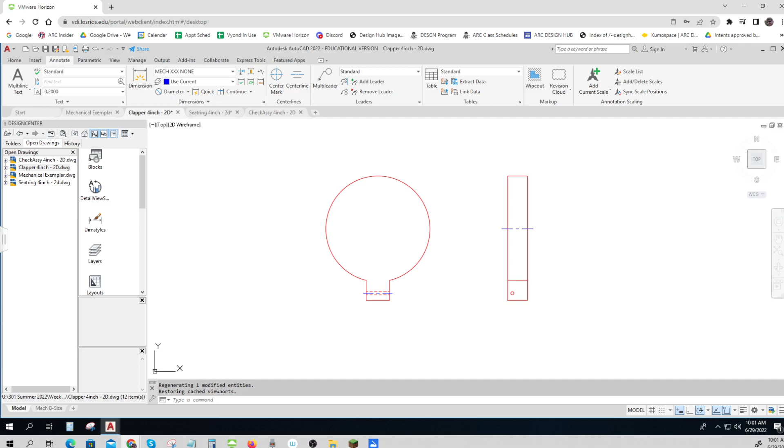And so the first thing I need to do is bring in my parts. And I'm going to do this a very simple, basic way. There are other more complex and cool and interesting ways, but this will work. So I've opened up my clapper. I'm in model space. And I'm going to select my actual part, right click, and I'm going to copy to the clipboard.

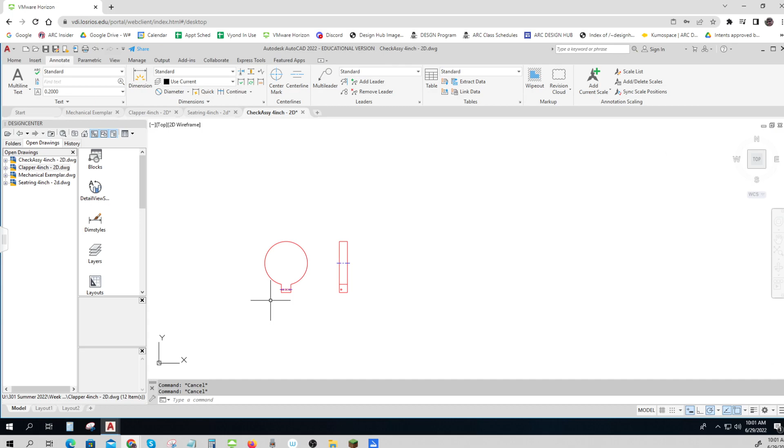And then I'll go to my drawing of the check assembly, right click, and paste. And there are my parts. So now I need to do the same thing with my seat ring. Go to the model. Highlight, right click, copy to the clipboard. Right click, paste.

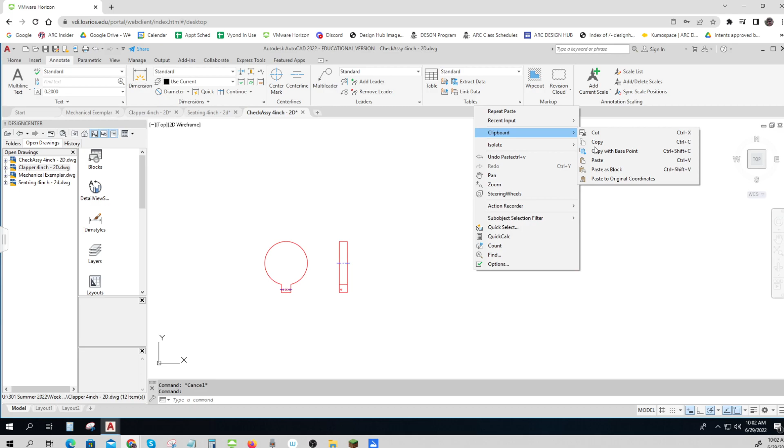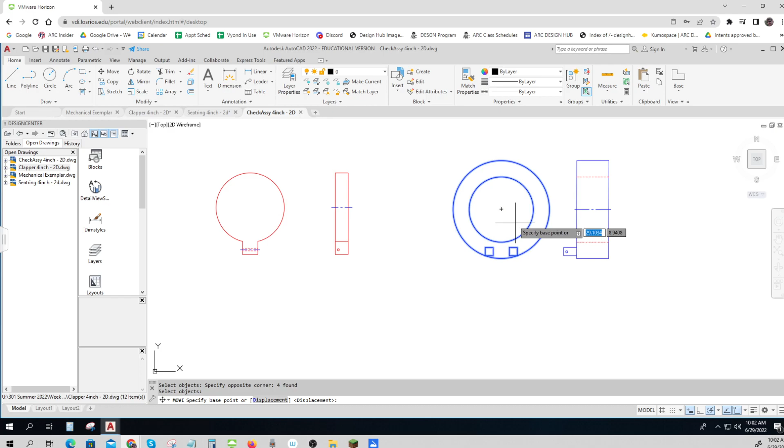Now it's just a matter of putting these parts together. So let me go ahead and do that. I'm going to put this part and line it up here. So that's the move command. And I'm going to place the center on the center. And that looks pretty good. Now this particular line, I want to change to a hidden line because it's underneath the clapper. There we go.

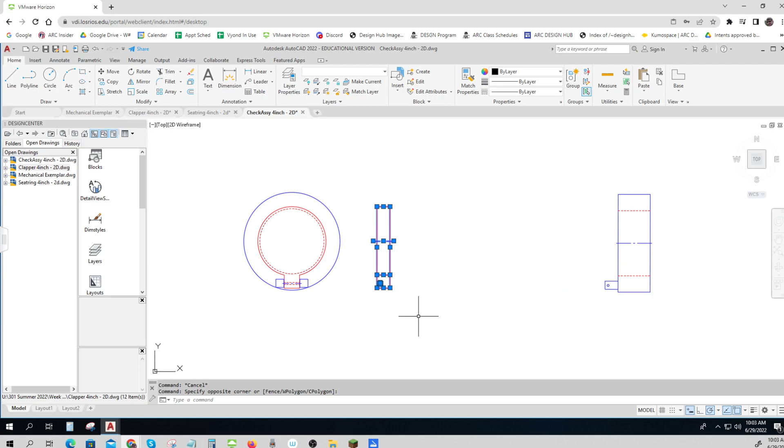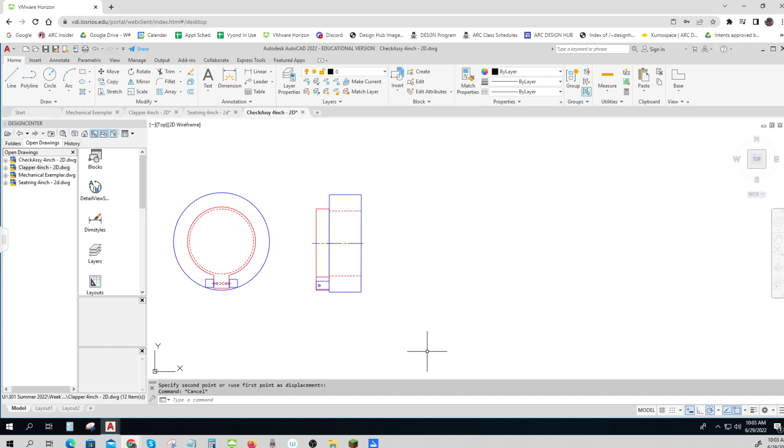And this one, I'm going to line these two little holes up, and hopefully two little holes line up. Yep, looks pretty good. So there we go. I've got my things done. So now I want to move these closer together so I can show them in my assembly. So I'll save that. I've got my parts put together. Looks like a check assembly. There's two parts. So I think that's going to go on a B-size drawing again.

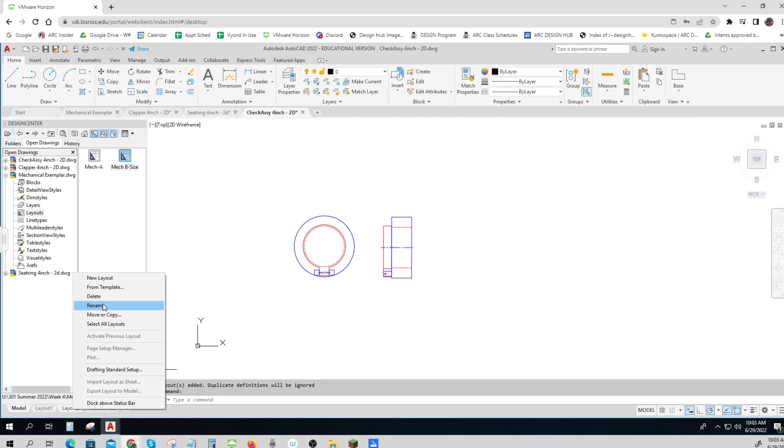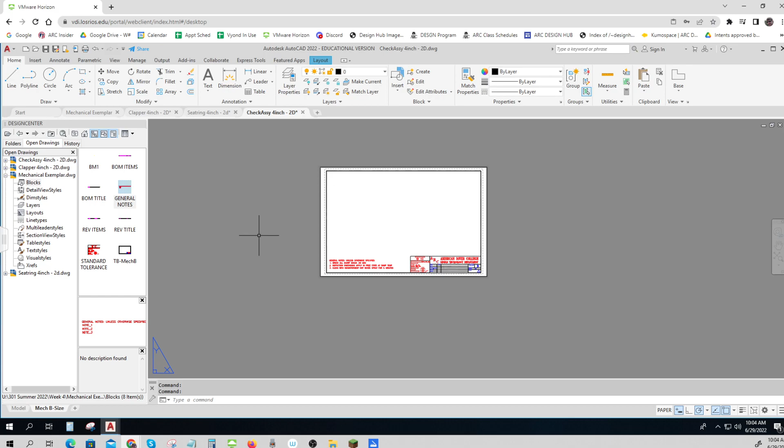So let me bring my layouts together and bring in a B-size. You're getting good at this by now. Right click, delete that layout. Right click, delete the other extra layout. I've got just my mechanical layout. I'm going to do the same thing. I'm going to put in my notes and all that kind of stuff. It's okay that we're using the exact same ones over and over again, and they may not be perfect and correct for what we're doing. But it's giving you the idea of what happens every time. Here's my revision block title and my items.

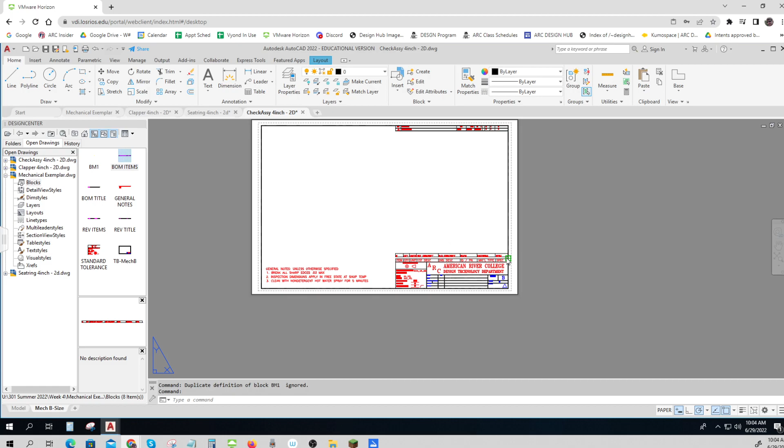There's one other thing that goes on an assembly drawing. That's a bill of materials. So I'm going to put my bill of materials title in, and then I have two items, so I need two of the items put in. And I'll go back and fix those at another time. So that's a new thing that goes on there. I'm going to have item 1 and item 2. Item 1 will be, for instance, my clapper, and item 2 will be the other one. What is this thing made out of?

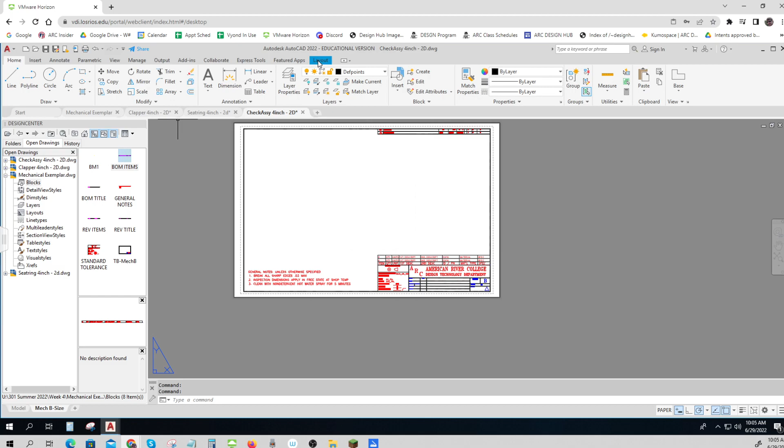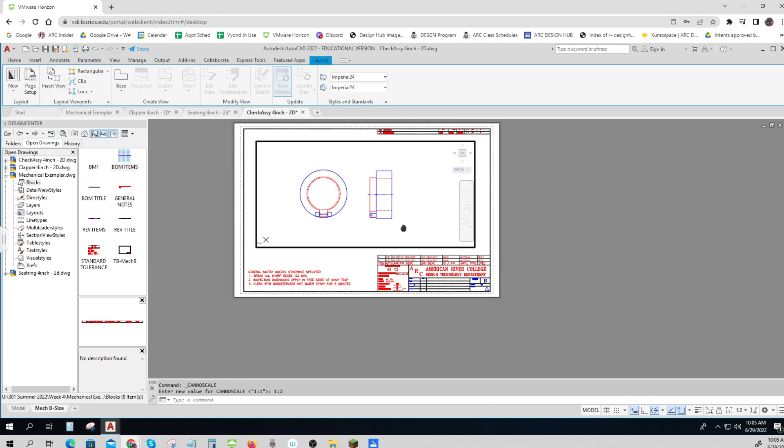So now we go back to our Defpoints layer, layout, rectangular, and let's see how it fits. Let's check our scale. I think that's too big. I think 1 = 2 is going to be fine for what we're going to need. I'm going to get a little bit off of the side over there. So 1 = 1 was too big. Took up too much without really giving me any benefit. Okay. And so that's really kind of cool.

Now there's a new thing I'm going to do. I'm going to make sure that I'm on my dim text layer. I'm going to annotate, and I'm going to put in a multi-leader. Let's see if I've got a style that's ready for me. See what the style looks like. I'm going to put in a leader and I'll change over to nearest. So I've got item number 1 or item number 2. I'll call that one item number 2. And I'll call this one item number 1. I have 2 items, a clapper and a seat ring.

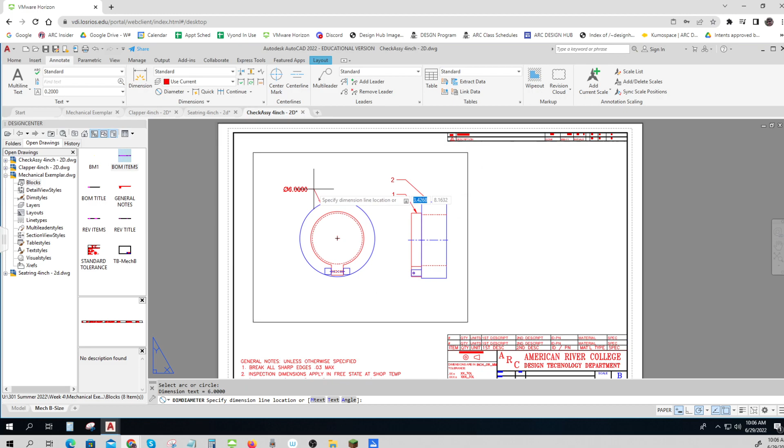Okay, now I can put some dimensions on and all that kind of stuff. Usually you don't put very many dimensions on here. Maybe I'll just put this one on here. And since this is a reference dimension, it's just there so somebody has an idea. This part has already been described fully in another drawing. I don't want to do it here, so I've highlighted it and I hit delete.

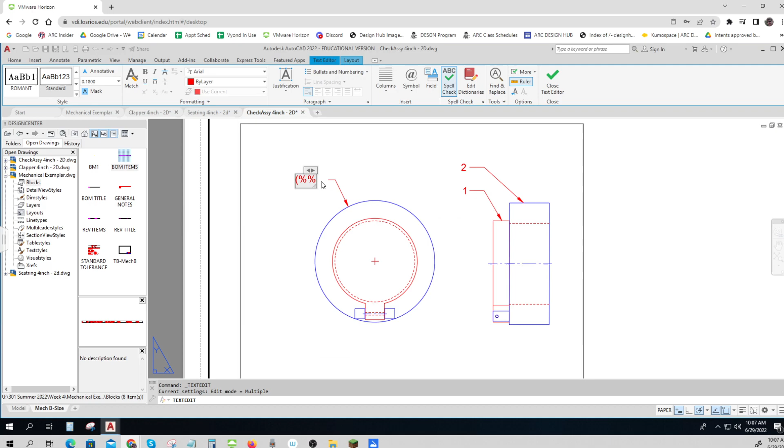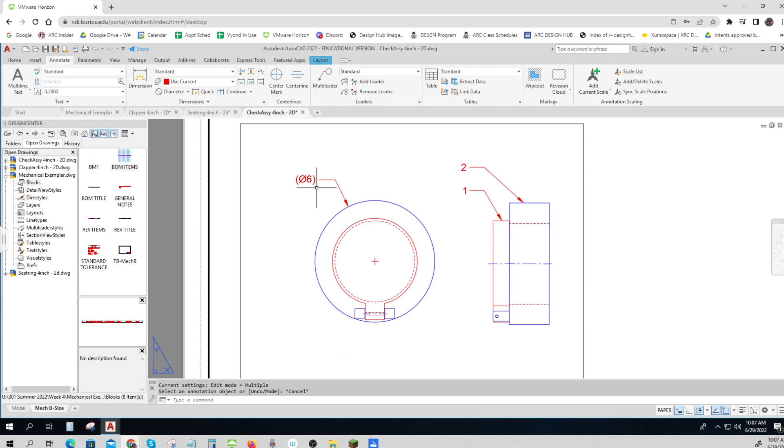And I'm going to use parentheses, %%C, sorry, %%D, no, %%C, that's the diameter sign, 6, and another parentheses. %%C gives you the diameter. So that tells me the parentheses says, oh, that's just kind of a quick little reference. Okay, and that's what goes on here.

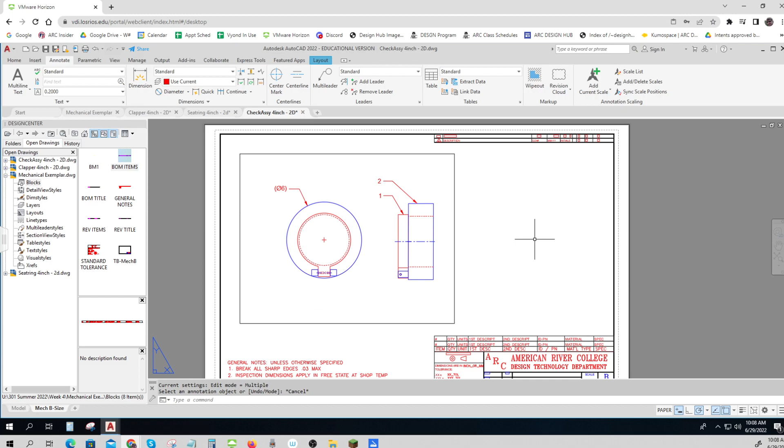Now, some people may want to see this as a section view. In this case, I don't think the section view helps me. I think it's a little bit easier to understand without the section view. So I'm going to leave it just like this. And that is your check assembly.